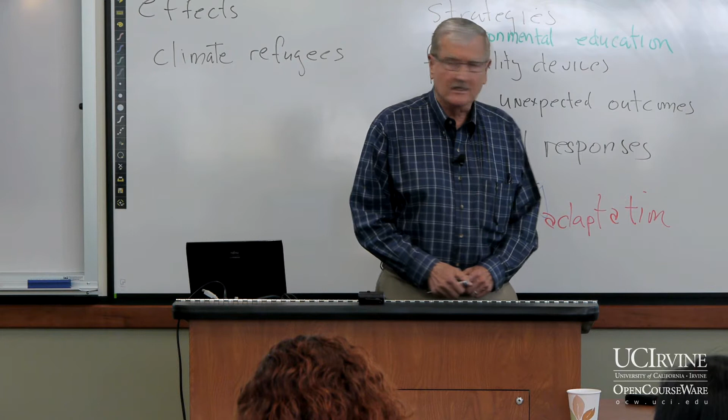Fuel cells will be an integral part of the renewable future, along with solar and wind. Solar and wind are intermittent, but still very valuable resources. We need a stable 24/7 source of electricity to complement solar and wind, and I will present some of those aspects to you. So you should think of this as a lecture on the future for sustainable energy for both transportation and the provision of electricity.

I'm going to start with something you're familiar with, which is the automobile, just to have you understand how it is that you travel from point to point in a vehicle that takes in gasoline and air, and through a process which we call combustion, transforms that energy bound in the fuel to thermal energy. That's something we in engineering can do something with. And with the automobile, we propel the automobile with the provision of useful power for society. Along with that comes another product that we would rather not have delivered, and that's called the exhaust.

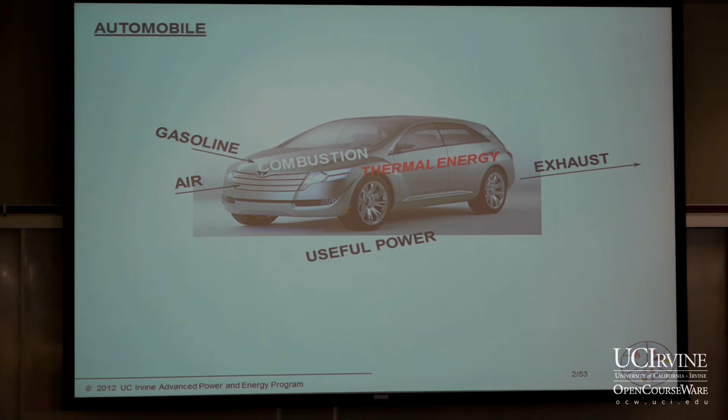With respect to propulsion, many of you came here to Irvine with jet aircraft. Here is a jet aircraft with the presentation of the engine underneath the wing. In this case, we compress the air to a high pressure and high temperature before we add the fuel. We again have combustion, and that provides us with that thermal energy. It's giving up that energy that's bound in the fuel to something we can do something with. And in this case, we provide a propulsion force to push that aircraft ahead. But then that other product, exhaust, comes along for the ride.

Many of us depend upon electricity. I certainly found that I did this morning when I woke up with our grid being down. The alarms did not go off. The lights did not go on. My computer did not go on so I could refine this presentation this morning. In fact, that's the place where that presentation was up until 10:30 when the lights came back on.

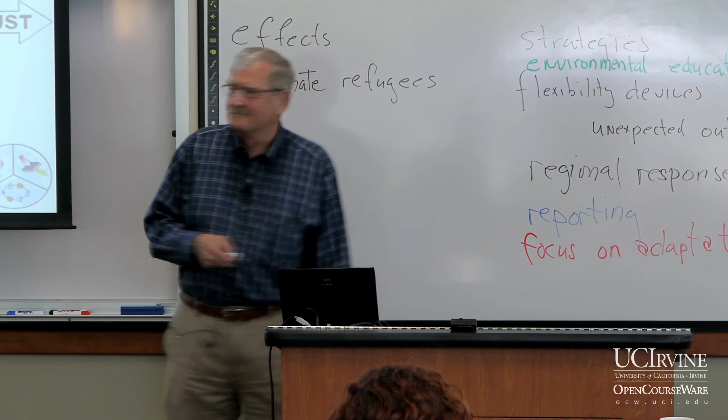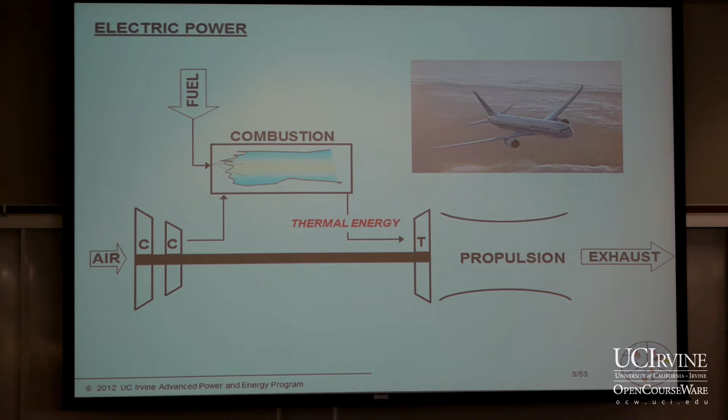In that case, we're after electricity. And this particular engine, called the gas turbine, is something we use to produce much of our electricity today. It's really the go-to technology where we take this off of the wing, place it and bolt it to the ground to provide not jet propulsion, but electric power. In that case, we take away this nozzle and we replace it with another turbine and electric generator to produce the electricity that we all depend upon as we do at this very moment.

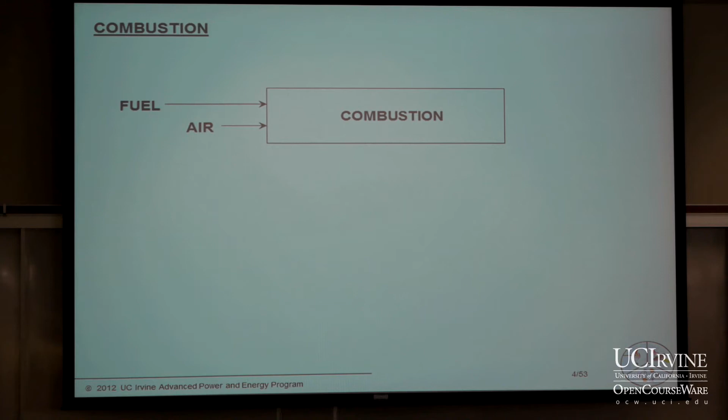That's the useful power. And then along comes with that, what? The exhaust, right? So if we go to a kind of a mechanical engineering description of this process, we have a box that's being fed with fuel and air. We have the combustion that's giving rise to that thermal energy. And then depending on the engine we're using, we produce that useful power. That's what we're really after for all of us to be able to utilize. But there's that other deliverable right here, the exhaust.

So I'm going to take a moment and tell you why I'm focusing on the exhaust. And that is because combustion produces 80% of the world's power today. Think about that, from the aircraft to the automobile to the truck to the ship to the locomotive to the provision of electricity. It served us very well for more than 100 years, but it has this exhaust. And that exhaust is made up of what we call the major products of combustion: CO2, water, and nitrogen. That's almost 100% of the exhaust.

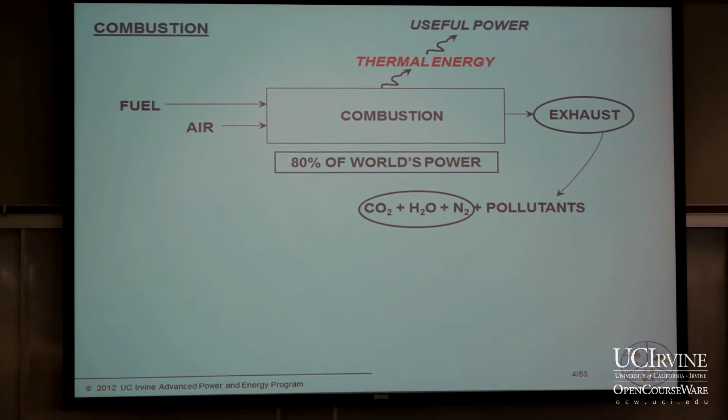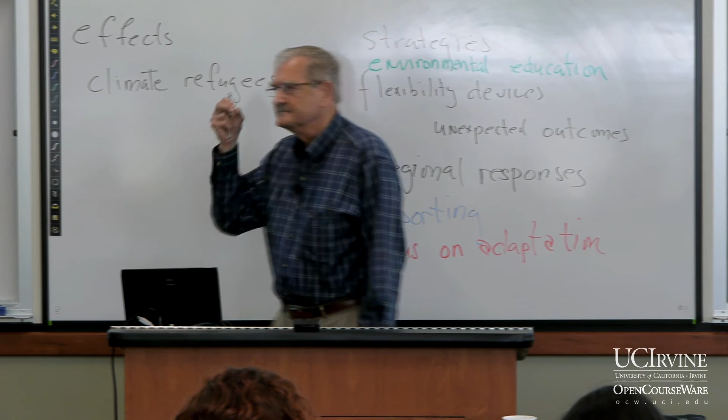And then in very small amounts, we have these other things that come along, and those are called pollutants. We'd like to ignore those. From an energy point of view, we do. They don't really amount to much. But Mother Nature has arranged for those pollutants to do something, to keep us aware that we need to be good stewards in the use of natural resources. One of those things it does is produce photochemical oxidant, which here in the Los Angeles area has been a challenge since the early 1940s. We call that smog. It's not the right term. It's really a photochemical oxidant, but nonetheless, it affects the public health.

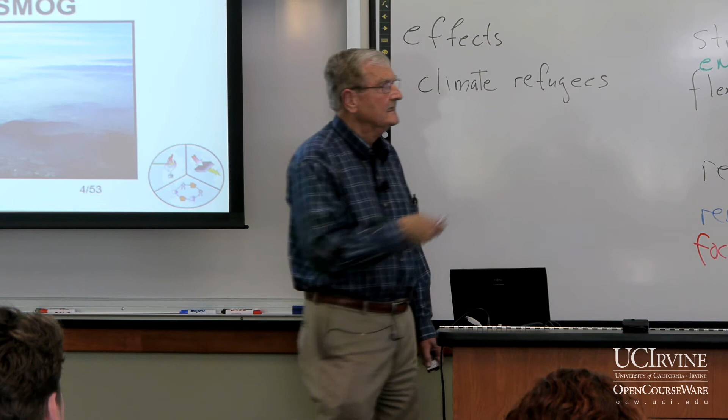We now have another issue, CO2, because it's increasing in the troposphere, and that, of course, is a greenhouse gas giving rise to global climate change. Just to put this into perspective, and this is really the main picture I'd like you to retain as we go through the lecture today, look at this picture of the Earth. It's pretty big, about 8,000 miles in diameter, and you see upon that Earth a small little bubble, sphere, purple, right here. That's all of the air associated with the Earth.

That's the volume of air associated with the volume of the Earth. If we spread that around the Earth, which Mother Nature did, it's a very thin onion skin, only 10 miles deep at most. It's a precious resource that for 100 years we've contaminated with pollutants and carbon dioxide, and we're being told that this is not healthy. We've been working on changes for 50 years, reducing emissions from automobiles and power plants, but it's not enough. Now we have this added issue of global climate change, giving rise to a major shift in the way we're going to have to do business in the next 100 years.

But before I get to that, we're talking here about exhaust contaminating the troposphere. That's pretty serious, right? Something we don't think about is this right here, that air. That air goes into the automobile, for example. Do you think about that? No, you're thinking about that gasoline and the dollars per gallon. But just think about one tank full of gasoline. Today in US dollars, that's about $50 to $60. It's about 20 gallons and it weighs about 180 pounds, about a body weight.

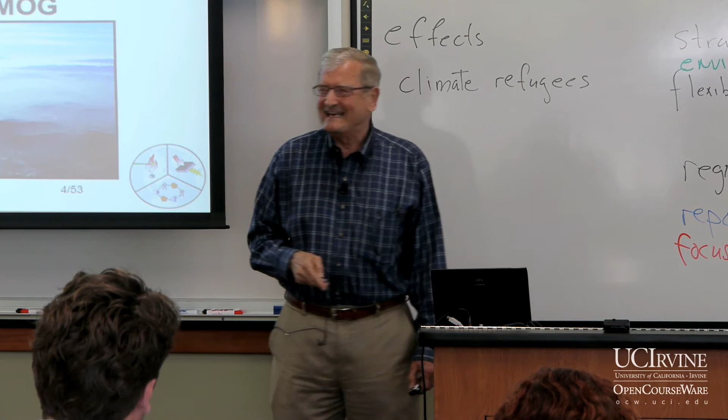So my question to you is, when we consume that tank full of gasoline, about 350 miles, how many pounds of air do you process? How many pounds of air go through your engine? Air is pretty light, gasoline's pretty heavy. A good guess is 10 pounds per 180 pounds of fuel. The actual answer is 2,000 pounds, one ton of air.

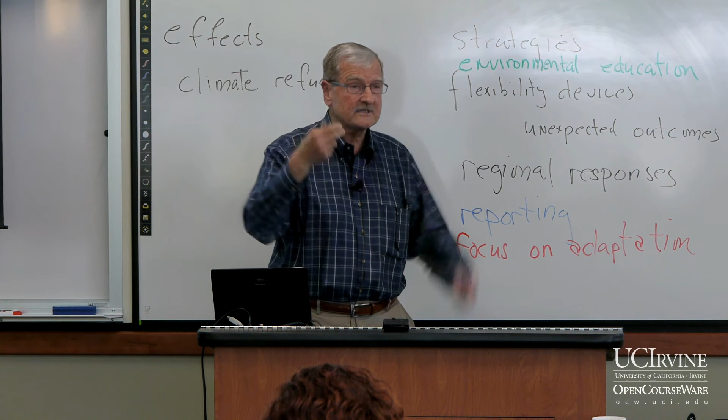Much of that is nitrogen, you know that from your physics. Some of it is oxygen, about 400 pounds. So 400 pounds of oxygen are consumed with every tank full of gasoline. Have we thought about what Mother Nature does with that? How does she replenish that into our atmosphere? How's she doing in that regard? I'll just leave it at that for you to ponder. But it is a resource, an air resource. We depend upon it, our food depends upon it, oxygen. And we're consuming it and expecting something out there to kind of replenish it and bring it back.

So in summary, I have a box here which shows that 80% of the world's power is associated with our use of combustion. Approximately 90% of the world's pollutants come from combustion. 94% of the world's CO2 comes from combustion. And with every tank full of gasoline that we utilize, we are consuming 400 pounds of oxygen.

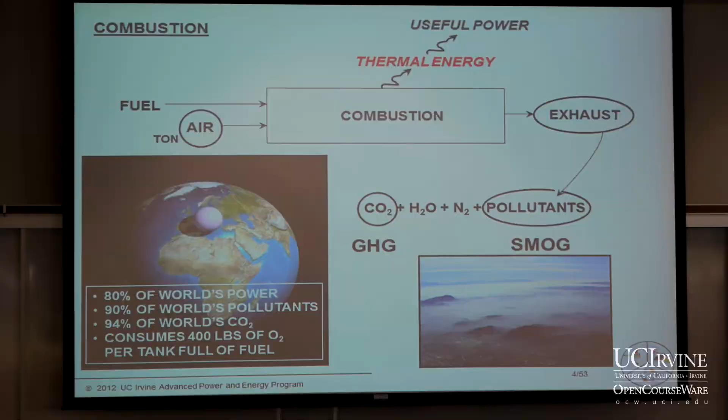Now with that, let's look at what we're up against. These are the forces that are causing change to your future. I would say my future as well, but you have more of a future than I do. I'm probably going to survive fine on gasoline. You're going to find a very different paradigm. So those of us like Professor Wiley and myself, when we were your age, the computer was just being part of the collegiate life, these big mainframes. And of course, now we have them here.

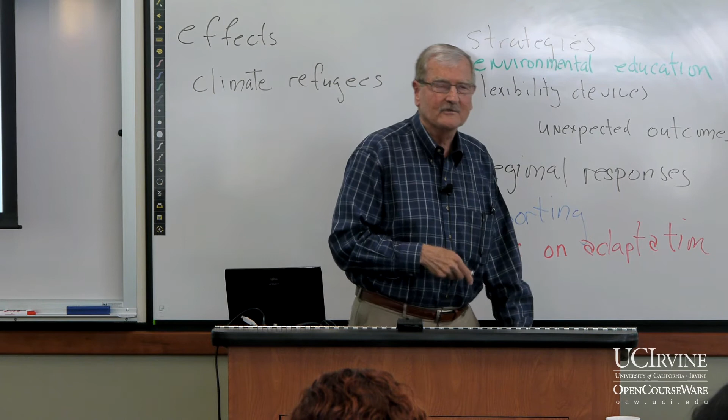You should think of the same as the fuel cell. Many of you are just hearing about it for the first time today. It'll be an integral part of your life in the future. So it's just a chance for you to see why that is. These are the forcing functions. Urban air quality, we aren't doing enough to bring that to the quality that our public deserves. Climate change, we know that we have a major challenge there, and our current way of doing business is not acceptable.

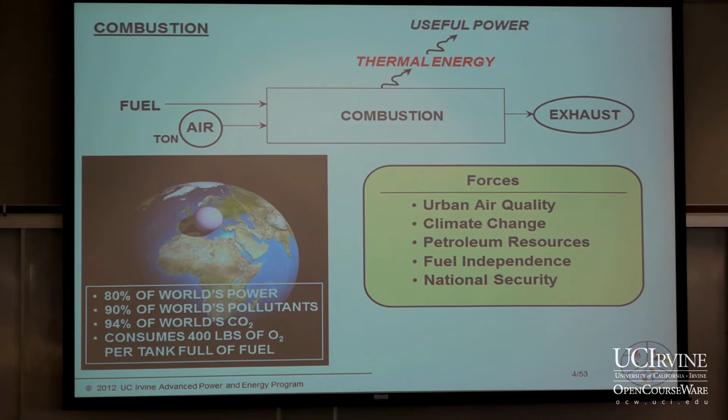We have now the recognition that petroleum is a finite resource. We're probably going to reach what's called the peak of the Hubbert curve in 2016, where we are using more than we're discovering. And since 9/11 in New York, we have fuel independence and national security concerns. Not only in the United States, but every country around the world would like to be in full control of its energy supply. Those are the driving forces.

The paradigm shifts are in transportation, in electric power generation, in building design, in conservation, and in the design of communities of the future. It's an extraordinary, exciting future. Who would have thought we'd be able to re-engineer basically society from transportation to electric power generation? We're able to start with a clean slate. There'll be a transition, there'll be many decades, but that's what we are able to be involved in right now.

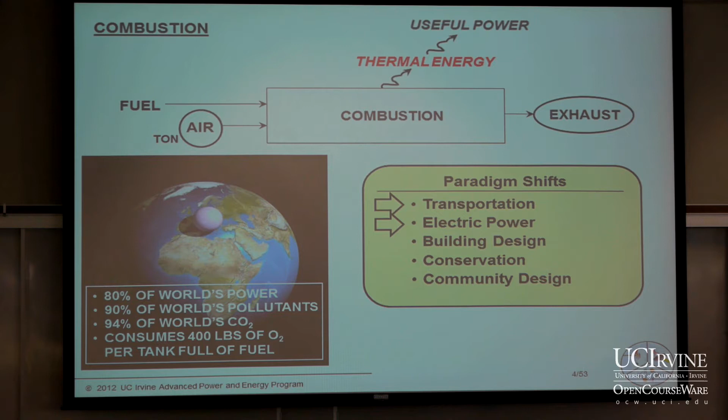How are we going to do it better in the next 100 years than we did in the prior 100 years? I'm going to focus on two of these, transportation and electric power. If you have questions on the others, we can go into those. But transportation and electric power make up about 70% of our energy portfolio, and so they deserve our attention.

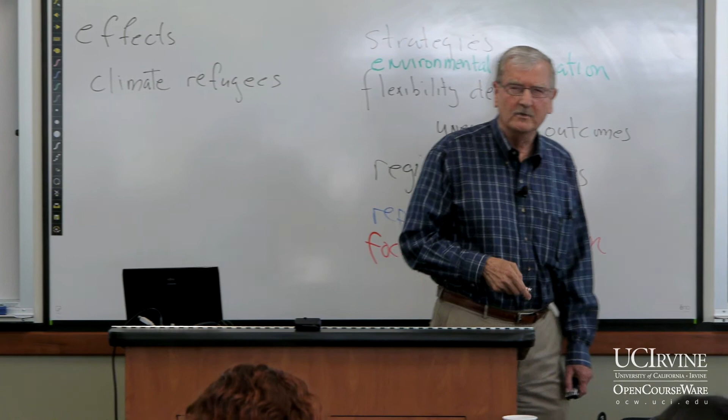Let's see if we can't do something better than that. We're going to focus on carbon dioxide because it's an indicator not only of the emissions of greenhouse gas from the automobile, but also it's an indicator of the efficiency. The lower the CO2 per mile traveled, the higher the efficiency of the vehicle. And I want to use this chart to provide us some guidance in that regard.

It's a chart that shows the emission of carbon dioxide, the greenhouse gas, from 0 to 1. So it's normalized to what's called the gasoline vehicle, where the normal vehicle is going to be 1. And you see right here something very interesting, which is the amount of CO2 that comes from the vehicle, shown here in orange, versus the amount of CO2 that comes from the generation, transport, and refining of the fuel to your pump. Only about 12% of the energy that goes into the automobile comes from getting that fuel to the automobile. It's very impressive, actually. I would have thought it would be more than that.

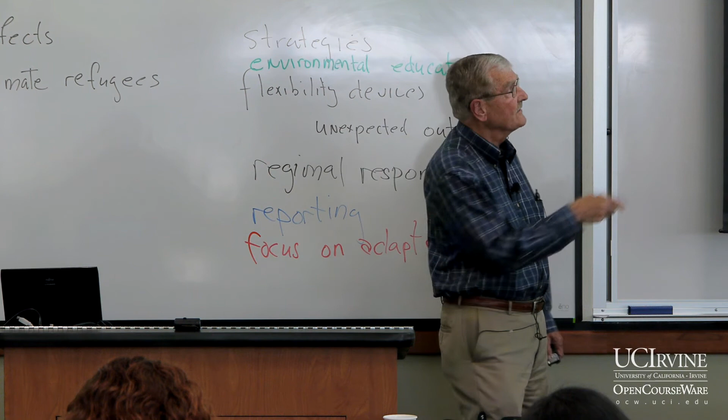So are we okay at that point? That's going to be our normalization. And our goal is to take this number from 1 down to 0. Because what we're after is an automobile that produces 0 CO2, completely eliminating the emission of carbon from the automobile.

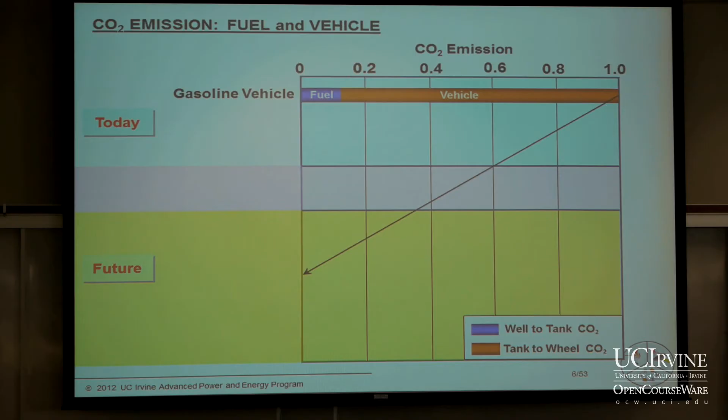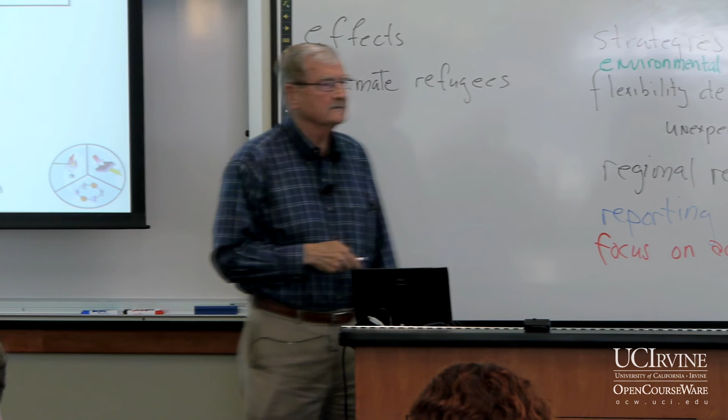And what it does, of course, it reduces the CO2, the water, the nitrogen, and the pollutants as well, correspondingly to that improved efficiency. That's a step in the right direction, and we already see that shift being deployed around the world. What if we take that vehicle and place it on this plot and see how it looks? It does what you expect. It reduces the emission of CO2 by about a factor of 2, corresponding to the increase in efficiency by a factor of 2.

Something else that we can do is go to a zero carbon fuel. For example, hydrogen. It's one of the attractive features of hydrogen, no carbon. What that does is not change much here, but it takes out of the exhaust any carbon-containing species: CO2, CO, and hydrocarbons. How does it look on our plot? It looks really good.

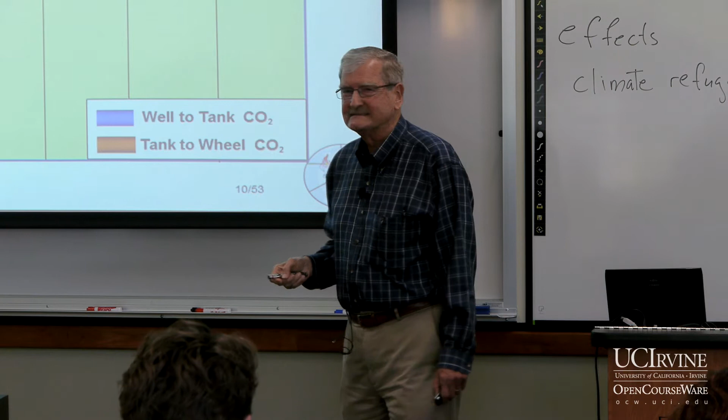It's actually not this good. That's what it looks like. Son of a gun, kicked ourselves in the shins.

It takes a lot of energy in the absence of advanced technologies to generate that hydrogen. But note there's no CO2 emission associated with the vehicle. This is all from the fuel production.

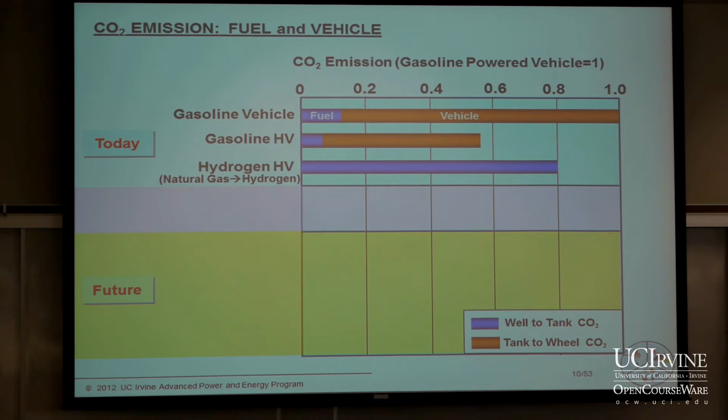Well, what can we do about that? We can introduce what we'll call the hybrid fuel cell vehicle. This would be your first glance at the role of the fuel cell in your future. Right here is the reciprocating combustion engine, and right here is the fuel cell replacing it. That's all it takes. Putting a fuel cell under the hood changes this up quite a bit.

That's one of the remarkable features and attributes of fuel cells: their very high fuel to electrical conversion efficiency.

What does it do here? Right here it reduces the amount of air we're processing to 500 pounds, and the amount of oxygen we're taking out of the atmosphere to 100 pounds per tank full of hydrogen. Over here we still have water, we still have nitrogen, but virtually no pollutant.

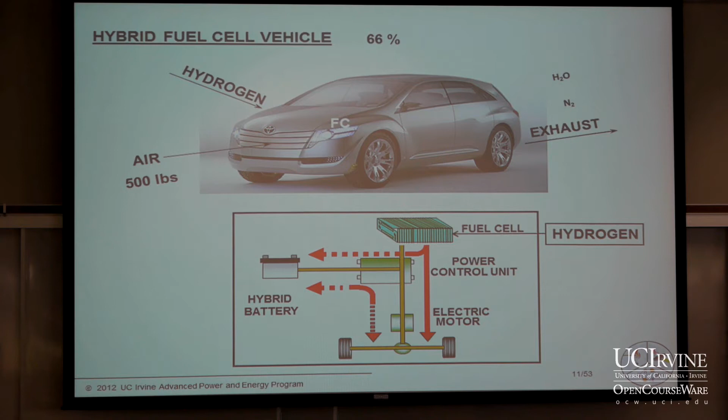What that does on this chart is give us this signature, and that's correct, going the right direction again. It's better than the gasoline hybrid, but not quite as much as you would expect. Still, it's going the right direction, and that's why, among other reasons, a fuel cell is so seriously considered for the future automobile. Let's take a moment and look at the fuel cell.

For us in engineering, that's fortuitous, because we would like to use electrons to drive a motor, to drive a load, to light a light bulb.

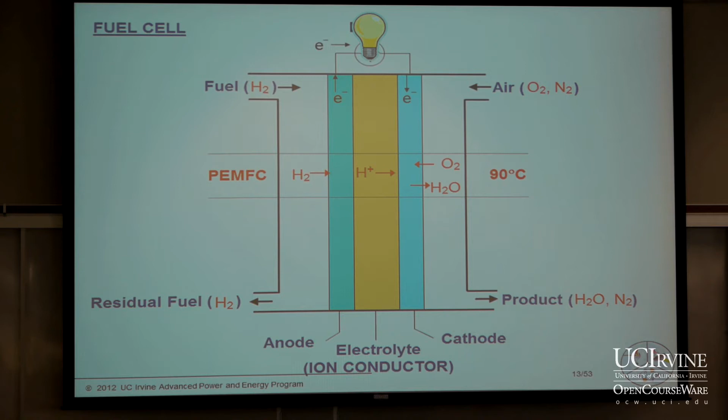This particular kind of fuel cell you can turn on and off like you do with your automobile today. So it has the right features for the automobile, and as a result it's selected as the fuel cell for your future.

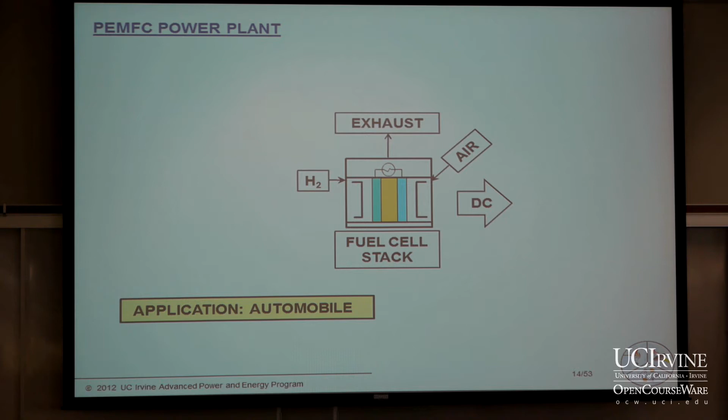If you look at the way the fuel cell would look underneath your hood, it would be a stack. It would have hydrogen coming to it, it would have air coming to it, and it would give out direct current to drive that motor of your fuel cell vehicle. And it would have the exhaust, which you now know is made up of water and nitrogen.

There are other types of vehicles already deployed in testing. There's the fuel cell bus in both Europe and some in the United States, quite a few in Japan. And a commercial vehicle is the forklift.

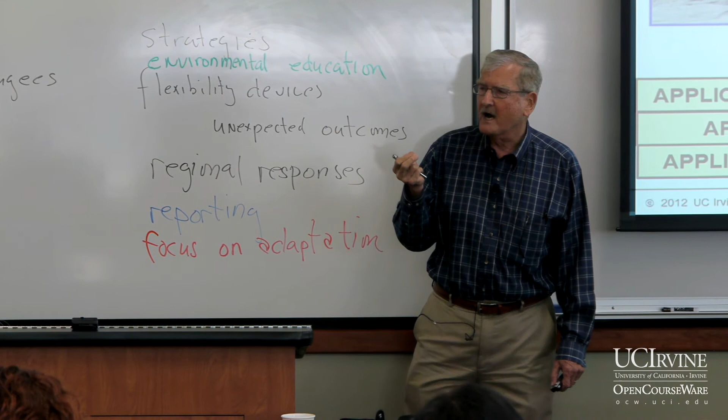Batteries take 4 to 8 hours to recharge. A fuel cell takes 4 minutes to recharge, and when charged, will run for many, many hours. A battery will not. So this is an extraordinarily popular early market for fuel cells today, in these specialty vehicles, these forklifts.

For these vehicles, the projection is 2015 for commercialization. Some companies are saying 2014. So we are preparing right now, because that's not too many years away, 2 to 3 years, for this vehicle to be available to those in certain areas of the world initially, primarily Japan, Europe, and the United States, in that time frame, 2014, 2015.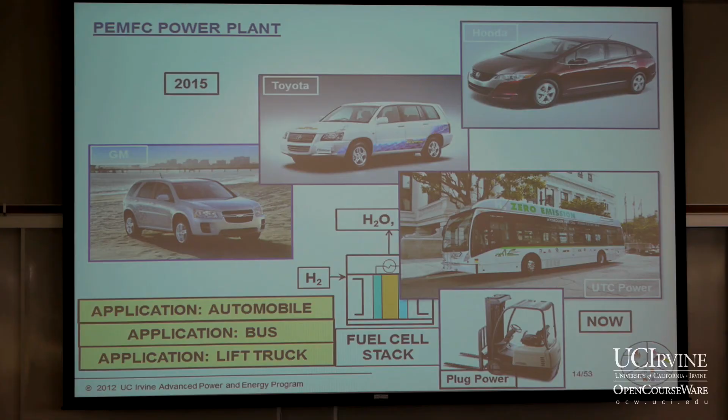The automobile companies have been committed to this since the late 1980s. They've invested billions of dollars to ride this technology. It's an extraordinary vehicle. You go bonkers to drive it. It's quiet, it's responsive, great acceleration, and just a real kick to have under your foot.

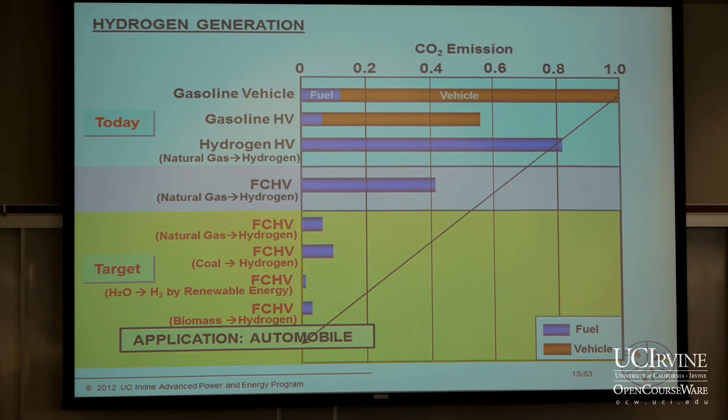I want to take a transition here from transportation we've been talking about to electric power. Before I do that, are there questions you have about the automobile?

Yes? Could you talk a little bit about the downside? It seems so perfect, but are there unintended consequences of transitioning to a hydrogen fuel cell, and what are some of those? So the question is, what is the downside? It seems almost too perfect. And the downside is that it is too perfect, because it's difficult for anybody to accept something that is that good. But time is showing that more and more there's an appreciation for it.

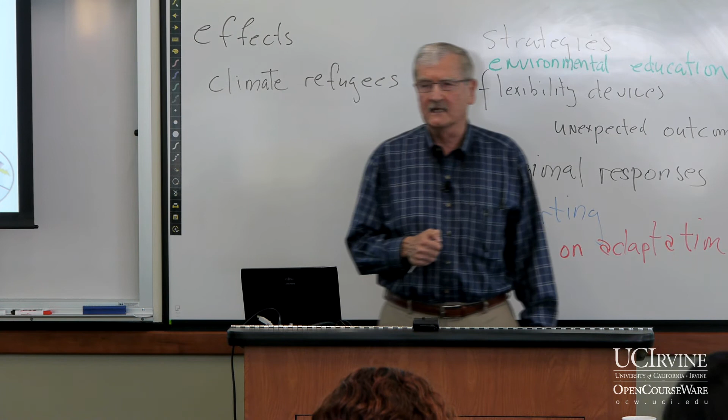There are three areas of concern that I identify. It would not be a downside right now, but a concern. One would be to assure that we continue on this path of generating hydrogen with a low carbon imprint. We really have to force that, come up with technologies that are economically viable to do that. The second is the hydrogen infrastructure for refueling. We're actually in a panic right now because we do not have that effectively deployed to where a market can be created. We must do that in the next 2 years, and that's a separate story, but that's a downside of recreating a new infrastructure for fueling.

Fortunately, it's only going to be about 15% of the gasoline stations we have today that have to be retrofitted with hydrogen to serve the entire public. So that's good news. And then the third concern would be safety. Like natural gas and like gasoline, hydrogen is flammable. It has a few characteristics that need to be addressed from a safety point of view.

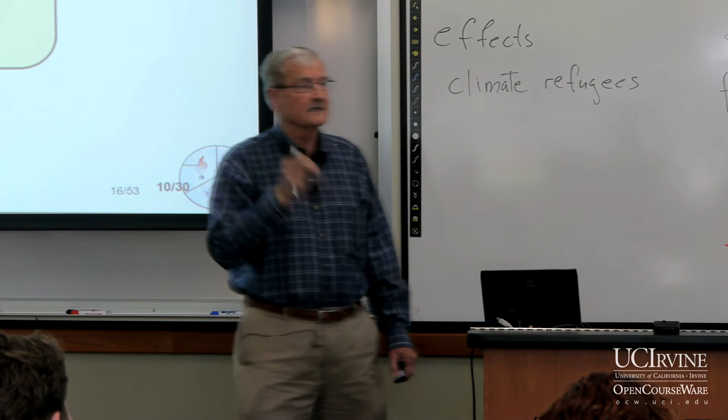I'll just mention two. One is an odorant, like you have with natural gas, so if there's a leak, you can smell it. And secondly, if it is ignited, it doesn't give off a highly visible flame. In fact, it's almost transparent. So an additive would not only provide the odorant, but also a bit of color, so if it does ignite, you would be able to see it and then just stay away from it, like in an automobile crash. Another question?

Yes. In the process of using electrolysis of water to extract the hydrogen, it has a very small carbon footprint. So where does that carbon footprint exactly come from? Is that calculated in the production of the equipment, or using chemicals, or where does that carbon footprint come from? So the question is, on this plot where we showed renewable electrolysis still had a carbon footprint, it comes from the transport of the renewable hydrogen to the point of use.

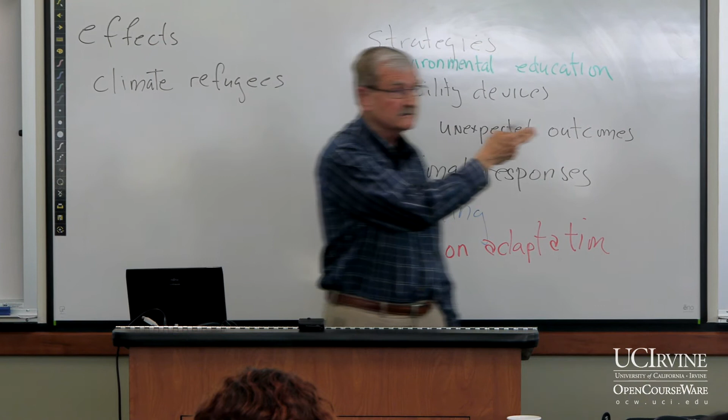We're expecting most of the hydrogen to be produced in large wind farms, which in the Los Angeles area are about 40 to 50 miles away—Beaumont being one, Tehachapi another. So the transport of it here by truck would have a carbon emission. We expect, though, not to be transporting it by truck, but by pipeline. The pipeline would almost bring that to zero because the electricity we'd use for the pipeline would use renewable electricity. So that little bit of the signature is based upon the assumption of truck transport.

Let's transition—we'll take one more question, thank you.

In the research that I've been around at the University of Florida, we talk a lot about fuel cells, and most particularly the catalyst that's used to split the hydrogen and oxygen. Are you using platinum as your catalyst for that in the cars? And if so, how do you see that demand for platinum in building fuel cells affecting the countries where platinum is most prevalent for extraction?

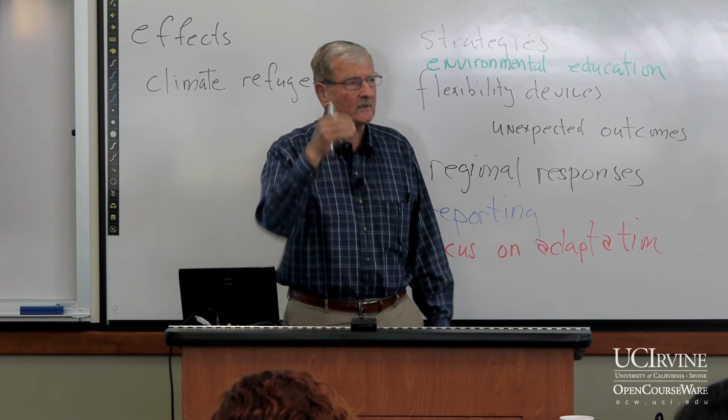The question has to do with the need of a noble metal in these fuel cells. In the proton exchange membrane fuel cell that we've just described for the automobile, it does require platinum on the anode to catalyze the reaction of the hydrogen. The automobile companies and other researchers in the last 8 years have dramatically reduced that loading to where it's less than the loading you already have in the catalytic muffler. So it is going to increase the demand for platinum, but with the process and progress being made in reducing that, and in alternatives, it's expected to not be nearly the issue that you are anticipating from your research. Still, it's to be proven, so we have to keep that high on the list of areas to watch. On the next fuel cells I'm going to introduce you to, no catalyst is required because they operate already at a higher temperature.

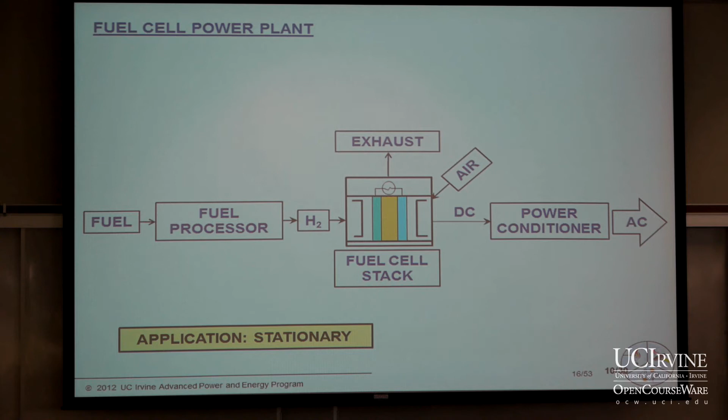Let's move to that. I want to go to fuel cells that produce electric power. We bolt those to the ground, so we call them a stationary application. To operate the fuel cell, we have to derive the hydrogen from a source. That source is typically natural gas, and we take that through a reformer in order to create that hydrogen. Direct current is something we don't normally use in an application like this room—we use alternating current. So over here we have an inverter, or power conditioner, to derive that AC. But otherwise, you see the basic principles of a stationary fuel cell system.

If I really look out into the future, what you might think about for a home or dormitory, some sort of housing unit somewhere in the world, would be a unit where there's sun available for photovoltaic on the roof—renewable—and then a fuel cell in the garage or to the side of the house. During the day, the photovoltaic provides electricity to the home, as you'd expect, but we can also provide electricity to the fuel cell. Usually many of us are not at home during the day and there's excess electricity, and the fuel cell can be run in reverse. It can take the water produced the night before and electrolyze it back to hydrogen and oxygen during the day.

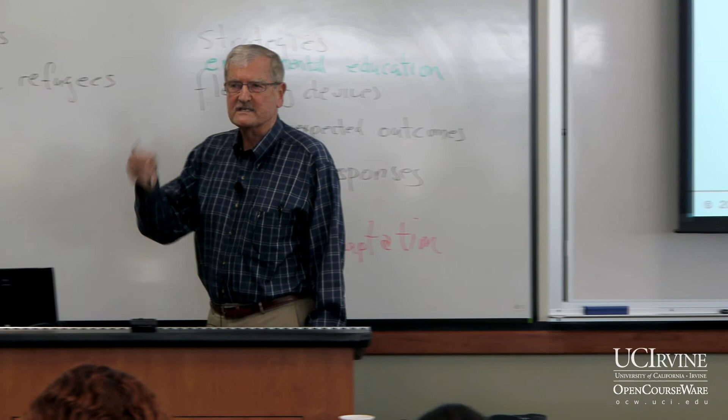So that when night comes, we can go to the fuel cell and ask it to operate in the forward direction and provide electricity to the house. In addition, you should also think about the likelihood of being able to provide hydrogen to your hydrogen fuel cell vehicle as well. Now, this has no connection to the grid, no connection to natural gas pipelines or a propane tank. It's renewable, regenerative, and non-fossil fuel, producing electricity 24/7, and with some water going into the system, hydrogen for the vehicle as well.

It's just a concept, but I want you to think about the epitome of a renewable operation of a home by integrating a photovoltaic panel with a fuel cell. I moved that up so I could introduce you to a larger fuel cell called a phosphoric acid fuel cell.

It operates at 200 degrees centigrade with virtually the same chemistry as the PEM. This is the longest running commercial fuel cell in the world, about 20 years.

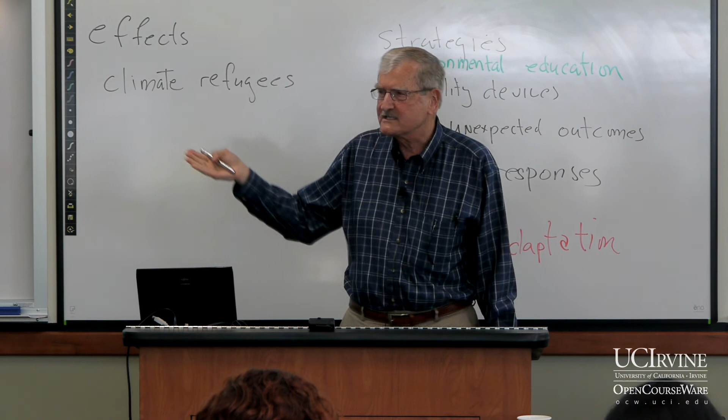Why haven't we heard about it? Because it's too perfect. It's hard to market something that's so good, doesn't make any noise, and doesn't turn anything at all. It just sits there and hums like a transformer. How excited have you been to see a transformer around campus? Those little green boxes—stop next time and just listen to it. It's a little bit like that; that's what a fuel cell sounds like.

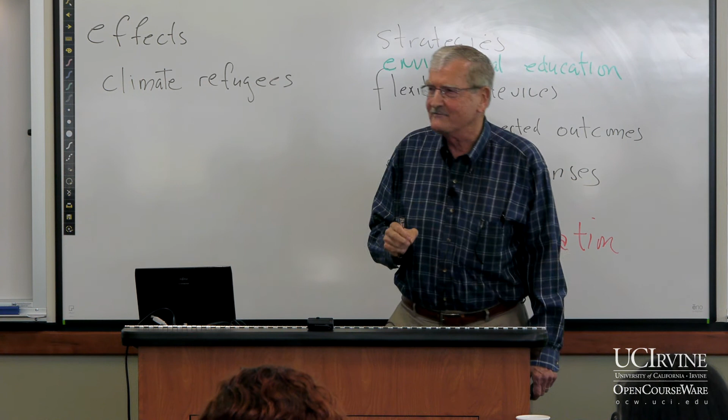Totally a disaster to market, but commercial for 20 years, in California—that's the state of California.

This turns out to be essential for marketing, because you've got to develop the confidence of the market that these things really work. It takes quite a time to get a variety of applications up and operating to where a new customer can say, where have you done it before? You can say, well, over there, let's go visit it.

That's now evolving in California to where we're about at what we call the tipping point, where this market will start to take off. Examples include, for this phosphoric acid fuel cell, a hospital in St. Helena—that's a 400 kilowatt fuel cell—and also a grocery store in San Diego, in Albertsons.

This fuel cell produces electricity at 40%, 42% fuel-to-electrical conversion efficiency. But remember, it runs hot, so the heat goes out of the exhaust and goes into a box at this Albertsons, and that box provides cold water that displaces a lot of the energy that goes into the refrigeration systems in grocery stores.

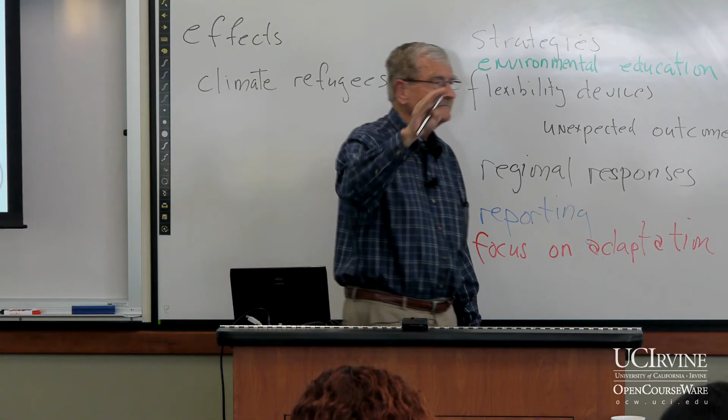Think about walking through a grocery store—you've got all those open refrigeration units, right? Takes a lot of energy. In this application, the heat coming out of the exhaust, that would otherwise go to the atmosphere, is being captured. It's called cogeneration: turned into cold water and displacing electricity that would otherwise be used for that refrigeration.

The heat coming out of that absorption chiller is even lower temperature. Rather than throwing it away, it goes through a desiccant. What's a desiccant? It's a material that is absorbing moisture from the market. When you're in the grocery store, there's actually a lot of moisture, and they have to dehumidify that. Often they take the air out of the building, put it through a desiccant that absorbs the water, and then bring back in the dry air.

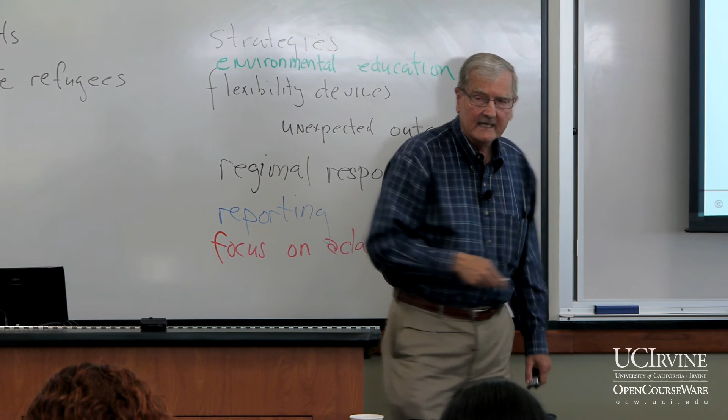You need to regenerate that wet desiccant. So by taking the low quality heat out of this unit, you can regenerate that desiccant. The overall efficiency jumps up to 80%. That's a whole new paradigm called cogeneration—just keep that in mind: combined heat and power, combined cooling, heat and power.

It gets into building efficiency, but I just want you to be aware of the utility of using power generators at the site of their application.

The world's record right now for energy efficiency is 92%. It's a casino in New Jersey that has exactly this system, and in the winter it takes the low temperature heat out of the desiccant—which is basically a throwaway, maybe 125 degrees Fahrenheit—and puts it through the sidewalks to keep them from icing, for safety of the customers coming into the casino. Overall efficiency of 92%. It's really, really a nice feel of the future.

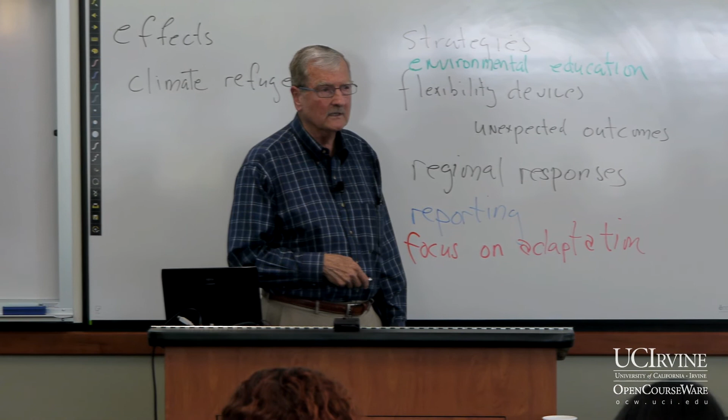This unit produces no pollutants. Remember, virtually no pollutants.

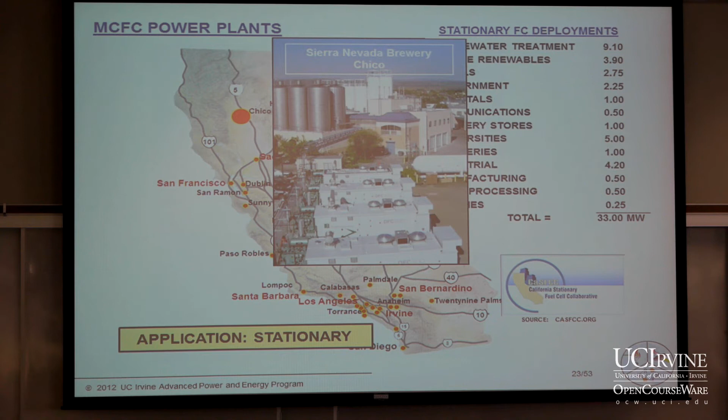That's molten carbonate. Another application you'll be much more aligned with is the Sierra Nevada Brewery in Chico, California. If you ever have Sierra Nevada beer, know that it's being produced by a fuel cell. The fuel cell is driven not by natural gas, but by a digester that's processing the beer waste and producing digester gas. Here you see 1 megawatt of power, and the heat goes back into the digester to support it, again with an overall efficiency of 80%.

It says 9 there, but in the last 4 weeks, 3 megawatts have been added out in Chino, California. And a hotel, 1.5 megawatts at a Sheraton.

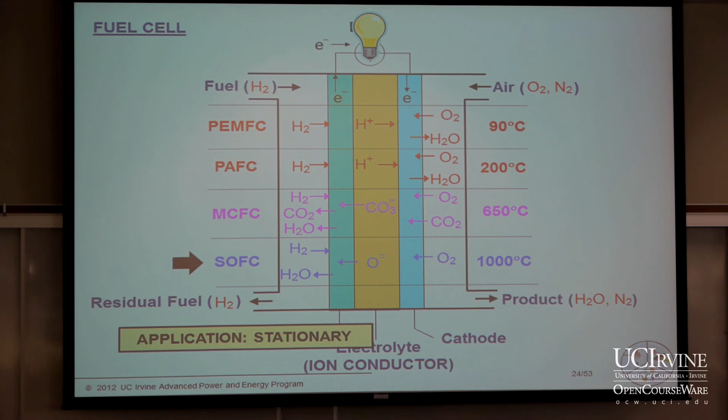The holy grail of fuel cell technology is called solid oxide fuel cell technology. You can see that it operates at an even higher temperature. It became commercial really about a year ago, in January, by a California company called Bloom Energy. They make the units in 100 kilowatt modules.

This is at eBay in Silicon Valley, so that's 500 kilowatts. This is at Google, 400 kilowatts. This is at Caltech, 2 megawatts, a very large installation there, again a university, and then a Walmart facility in Hemet of about 600 kilowatts. So that kind of gives you a feel of the early market, what they look like, how they perform, and why they are going to be so very popular.

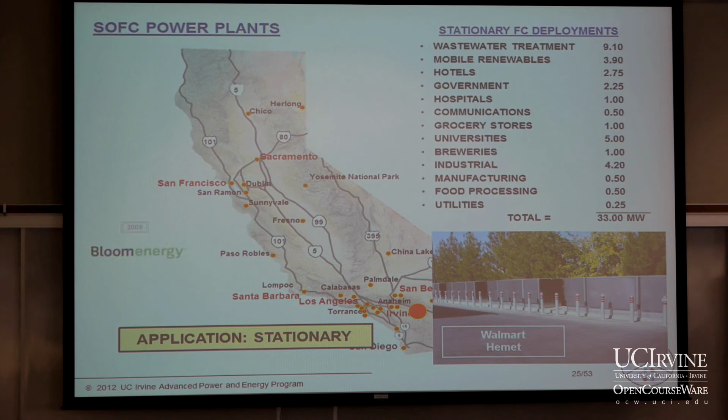From a political and business point of view, I wanted to share an experiment by the University of California, which was to establish a collaborative in 2001 that has as its board of directors a unique group. They're called government agencies, involving California agencies somehow involved in fuel cell technology. It might be in technology development, such as the California Energy Commission, in regulation, such as the California Air Resources Board or the California Public Utilities Commission, or in the actual acquisition of fuel cells for buildings in California, such as the California Department of General Services.

We added to that the federal agencies—Energy, Defense, GSA, and EPA—and then regional agencies. This group meets twice a year in Sacramento to talk about how the agencies can collaborate, cooperate, and share resources, and what kind of policies are needed and need to be advocated for. It's been an extremely powerful and successful activity in spawning the market of 33 megawatts that you see here.

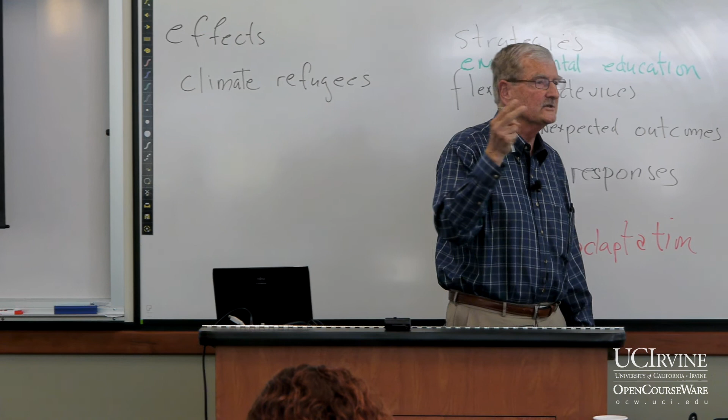What's the difference? It's policy. It's called a feed-in tariff, just now being introduced in California. When you think of markets, you have to think about policy, particularly markets so different from what we're used to. The companies driving the Korean market are U.S. companies—UTC Power with phosphoric acid, and Fuel Cell Energy with molten carbonate. So ironically, today the United States has leadership in fuel cell technology, but we're exporting almost 5 times more than we're deploying domestically. Policy.

To address policy, there's an industry advisory panel headed by one of the members, and here's the makeup of the industry advisory panel, which meets the day before to identify the kind of market constraints being faced and to convey that to the board of directors to consider the following day.

So a bit in summary, this is where fuel cells are being deployed today in major markets: industrial applications, hospitals, office buildings, hotels, and wastewater treatment plants for that renewable 24/7 application. I also indicated that ClearEdge is beginning to deploy fuel cells in residential applications. We see in the future, maybe not too distant, utilities acquiring fuel cells to support the grid at pinch points. We call these Tiger stations, or Transmission Integrated Grid Energy Resource.

With respect to central power plants, you can see the manner by which countries typically produce central power, combustion providing most of it. But the type of technology that's evolving for central power plants is an integration of fuel cells with gas turbines, called hybrid systems. We don't expect those to be deployed for another 15 years, but the design is well underway. For power plants, it would have 75% efficiency on natural gas, zero emission of criteria pollutants, and sequestration-ready CO2 effluent.

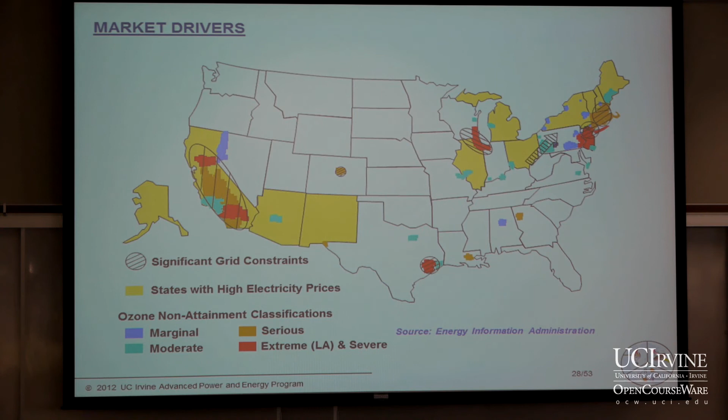Attributes of stationary fuel cells: high fuel-to-electricity efficiency, high quality heat, acoustically benign, virtually zero emission of criteria pollutants, and a fortuitous fit for distributed generation where you apply it at the point of use because it doesn't make any sound, it doesn't emit any pollution. You have people around like you do in this building, and that's why fuel cells are working so well.

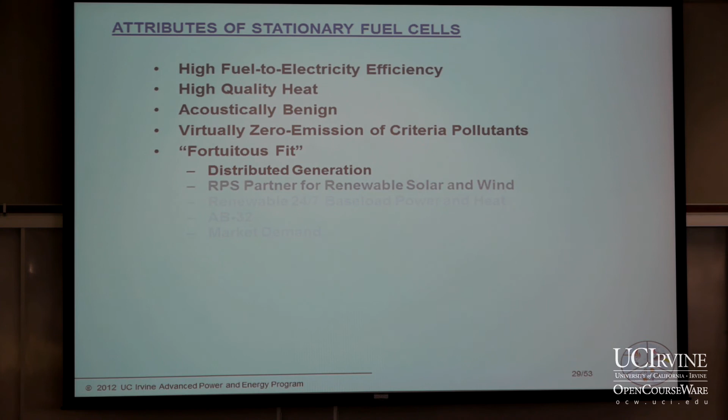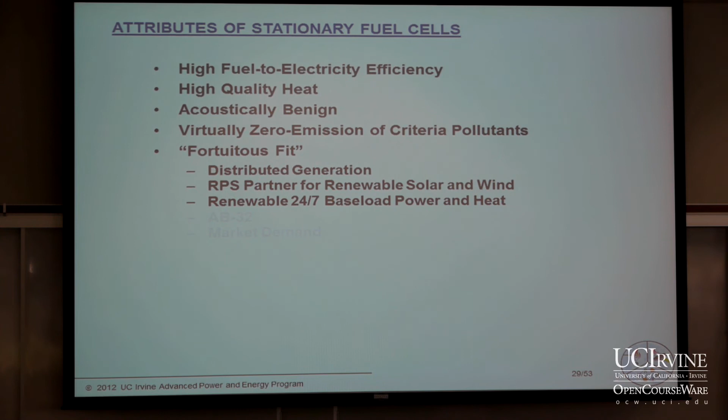A partner—I think I just want to share with you the other attributes of distributed generation. I'll just move on. It's a partner for renewable solar and wind that I alluded to right at the beginning. It also provides 24/7 baseload power and heat. It's very effective in meeting AB 32.

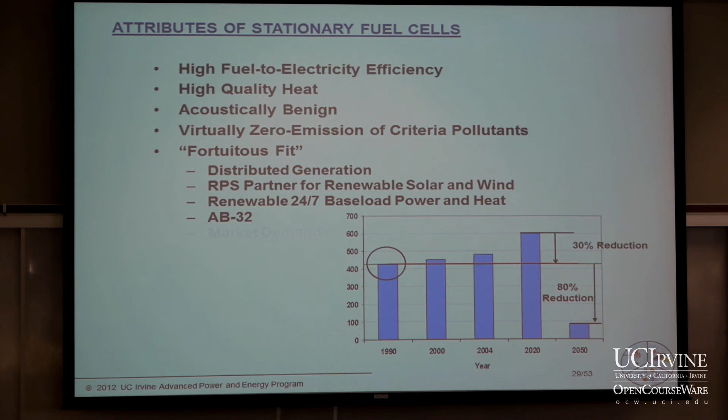That's a 30% reduction. And not quite by law yet, but by governor's directive, we must reduce this by another 80% by 2050. That's really the Kyoto Accords, in California, because the U.S. hasn't adopted them, has gone ahead to adopt them. So we are on a very major track to reaching this goal, and all these attributes give rise to a very major resource of fuel cells to achieving that, and now we're starting to see market demand.

Questions that are regularly asked about stationary fuel cells are: is it a proven technology? So I mentioned the 20 years already of commercialization, a wide portfolio of applications, a burgeoning track record of deployment, and a critical role of the DOE investment in early years, 1970s in particular.

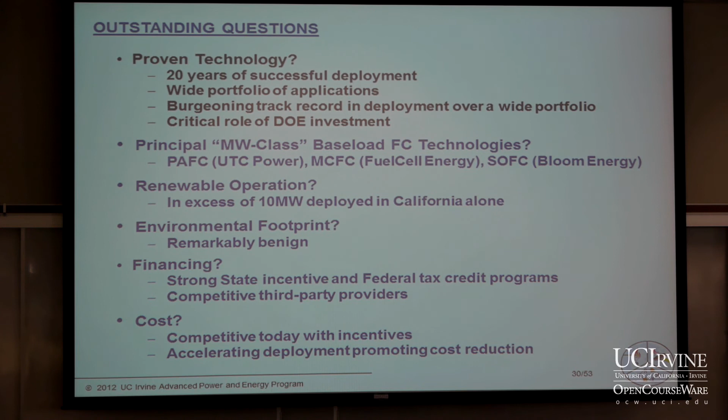Are there megawatt class technologies? The answer is yes. We just had announced last week a 60 megawatt deployment to Korea, so we're in tens of megawatts now. Renewable operation, over 10 megawatts deployed in California alone. Environmental footprint, remarkably benign. Financing—there's strong incentives to buy down the high cost of fuel cells today. And I say here, the cost is competitive today, but we're on a path of acceleration to reducing that cost.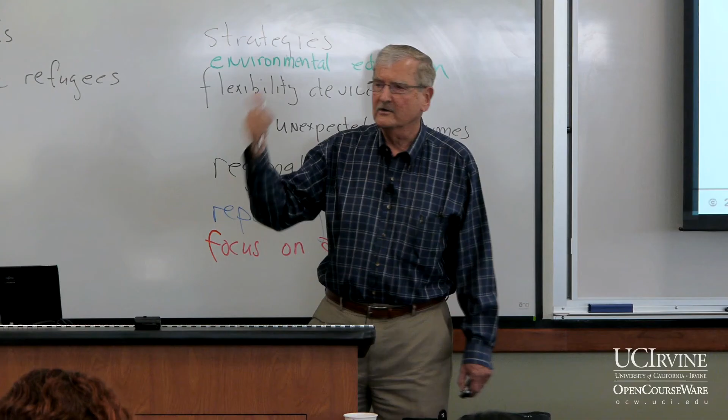It's located here at UC Irvine, and the reason it's so popular is that all the automobile companies in the world have been using this area for testing these vehicles for the last 10 years. This has been the station supporting Toyota, Nissan, Honda, Hyundai, Mercedes, General Motors. All the vehicles are operating here out of the station.

The station is supplied with liquid hydrogen from a processing plant in California that produces it from natural gas. But what if, instead, we brought in a stationary fuel cell operating on natural gas, provided electricity over here to a customer, these condominiums, provided heat and cooling to those condominiums, and then on demand provided hydrogen to support the station.

It seems like a simple concept. What I want you to understand is that today that's the most energy efficient and environmentally responsible way of producing hydrogen 24/7. We call that an energy station.

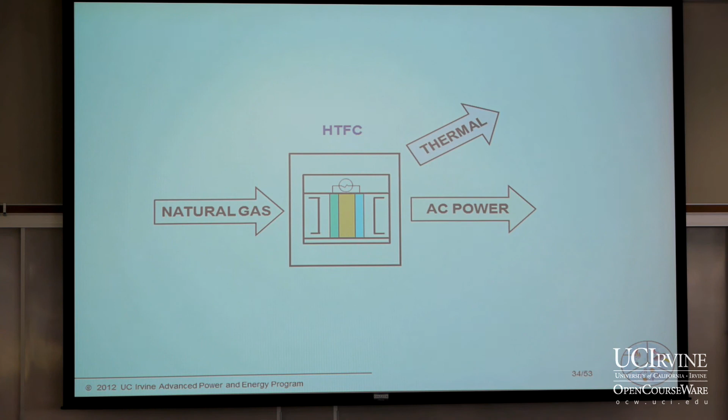Now, if instead we use natural gas here, here it is in a cartoon version of how it would work. Let me just show you why it's so successful. There's a synergism, and this is the first example I want to share with you.

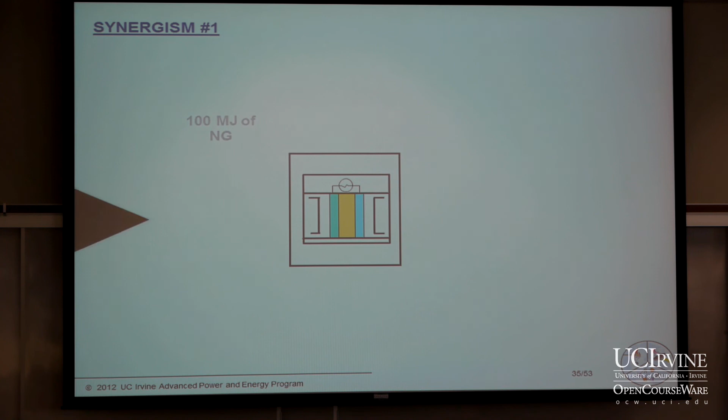Let's put into this fuel cell some natural gas, 100 megajoules of natural gas, and out of it we'll get 47 megajoules of electricity and about 53 megajoules of high-quality heat. That's the way the fuel cell, at least molten carbonate, operates.

If instead we change to a tri-generation mode, where instead of just electricity and heat, we add the generation of hydrogen, we can do that by increasing the input of natural gas by 43%, putting in 143 megajoules of natural gas. We still get 47 megajoules of electricity and 53 megajoules of high-quality heat, but now we also get 43 megajoules of hydrogen.

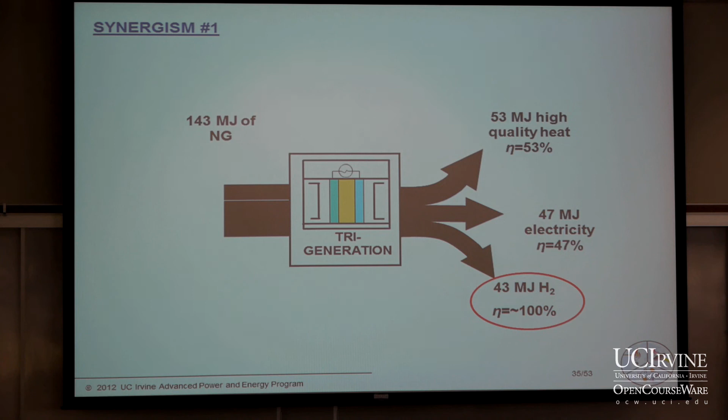The reason the efficiency is just about 100% is due to the synergism. The higher the hydrogen in the anode, the higher the efficiency of the fuel cell. Most of you who have had chemistry know that when you increase the concentration of reactants, the reaction goes faster. Same principle here. Typically we don't do that because we don't have a use for the hydrogen. But now we've come up with the use of the hydrogen, and that is to support a hydrogen fueling station.

Now what if instead of natural gas we bring in another supply of fuel, a renewable fuel? This ties in to Professor Whiteley's renewable energy concept. I told you I'd bring in little snippets of it. What we get out of this now would be a renewable energy station with the electricity, the thermal product, and the hydrogen all coming from a renewable resource.

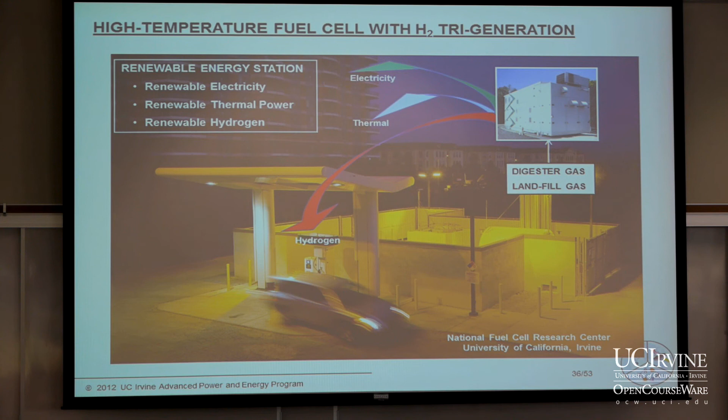Pie in the sky? Possibly. It does reach this goal of zero carbon because we're using human waste to produce the fuel.

And it produces now the hot water, but it also at the same time produces another product, electricity. In this example it could be hundreds of kilowatts or megawatts. This is what's deployed around 10 megawatts in California. That's why it's so successful.

This new technology, where we bore into the fuel cell and extract out hydrogen on demand, is the unique feature of this biohydrogen. And this picture is really the epitome of sustainability. It's using human waste to produce electricity, which we need, heat or cooling, which we need, and then the transportation fuel, which we desire, all from human waste.

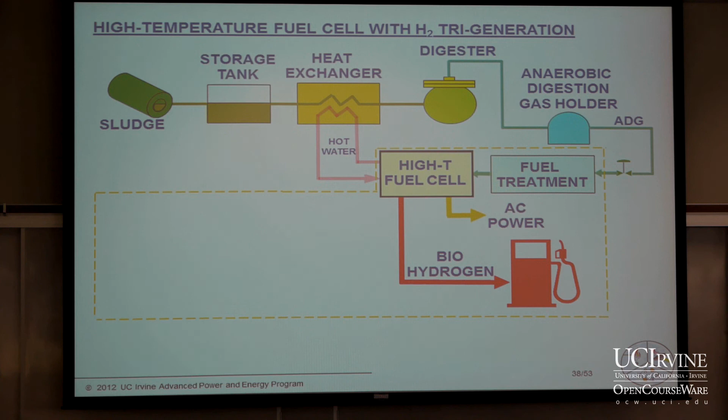This is actually in operation today, about 10 miles from here, north, at a facility called the Orange County Sanitation District. It was commissioned about a year ago, and today you can actually go and obtain hydrogen from the human waste at that particular station. This was a strategic alliance of these companies. You'll find this technology probably being deployed in many different areas as time goes on to produce hydrogen from various domestic sources around the country.

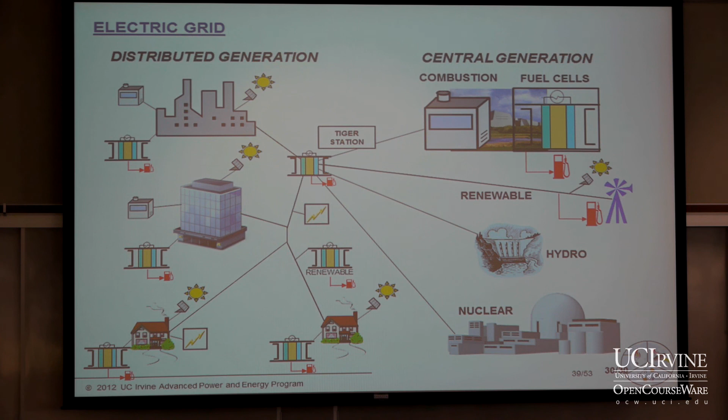Synergism 2, and we're getting close to closure, is coming back to our gas turbine that's generating electricity. If we take the combustion away and replace it with a fuel cell, it turns out that the fuel cell operates much better. It likes a pressurized environment, something we didn't know 15 years ago. And it gives rise to the oxidation of fuel and air to drive the turbines, but at the same time producing electricity that the combustion alone did not do.

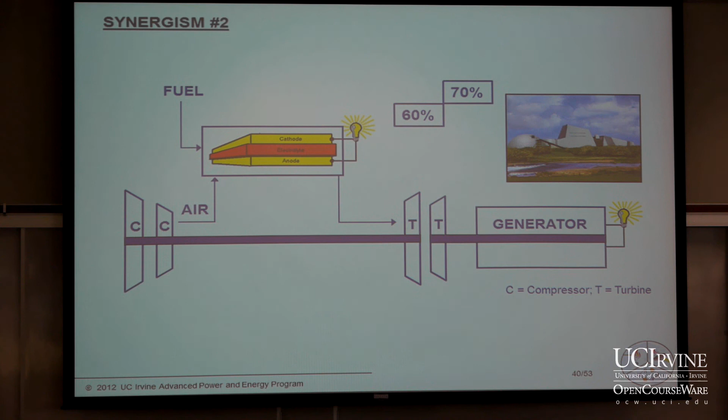Notice, no electricity here, producing pollutants. Here, electricity, higher conversion of fuel to electricity and no pollutants. So we're projecting fuel-electrical conversion efficiencies of 60%, 70%, and even above 70% in the future. This is called a hybrid fuel cell gas turbine.

And where is it going to be deployed? Well, let's look first at how it looks on this map. This is a plot of efficiency of the power generator as a function of its size. So 1 kilowatt is like a home, 1 megawatt is a hotel, 10 megawatts would be a university. Here at UCI, our peak load is around 28 megawatts. And then central power is 1,000 megawatts.

We populate this space with gas turbines today, and you can see we're getting up to higher and higher efficiencies. To do that, we have to go to larger units. And there's a thermodynamic boundary based upon the Carnot efficiency of about 65%. We're getting pretty close to that with current systems today, very impressive with high distributed generation applications or central power. Kawasaki particularly is deploying one of those HAT, humid air turbine, cycles today.

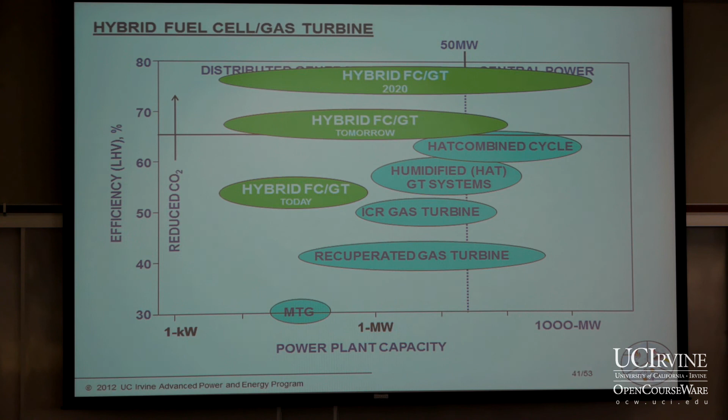Where does a hybrid pencil out? Right here today, it's operating in Montana at 53%. Tomorrow, 65%. And then in about 10 years, we believe, approaching 80%. And not only is the efficiency going up, but the range of application is going up as well. Very attractive for distributed generation.

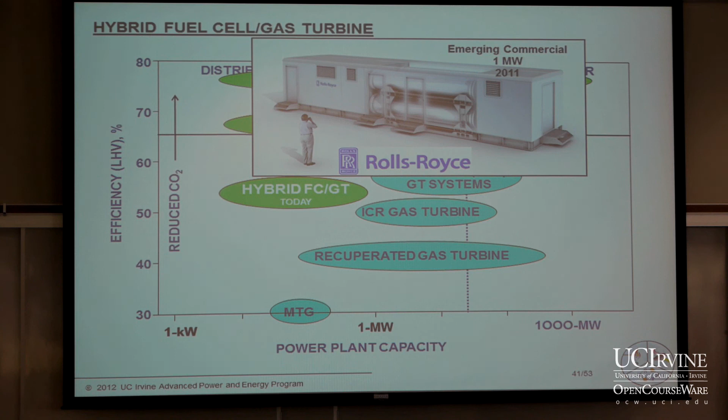Other places that you'll see it would be locomotives, a very major project going on with Union Pacific, General Electric, repowering locomotives for the future. Today, diesel electric is 30% efficiency, with substantial emission of pollutants. Can you imagine this being at 75, 80% efficiency, zero emission of pollutants, and acoustically benign?

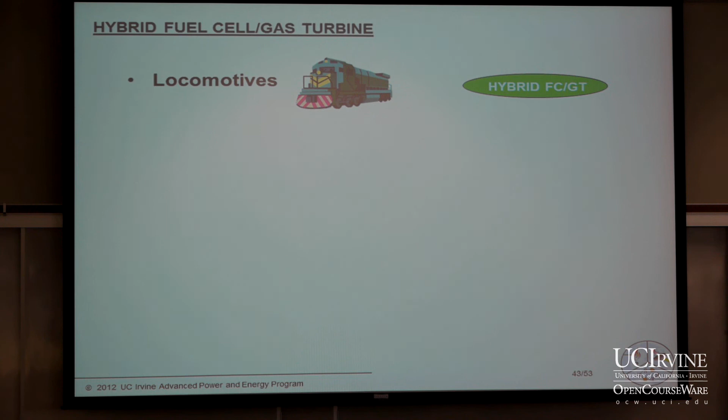Airbus and Boeing are right now competing vigorously to be first to have fuel cells on board. In the Paris Air Show last year, Airbus had an airplane that said right along the top, fuel cell powered. Not for propulsion, but for hoteling, providing the hoteling on the aircraft. Boeing and Airbus are competing for the most environmentally sensitive and sustainable aircraft in the world, and hoteling is a big part of having a competitive edge, and fuel cell hybrid systems are the technology of choice. So somewhat ironically, while this seems a little bit out of place, this will be the first commercial application other than distributed generation.

So these are the two areas that we focused on: transportation and electric power. We went through these examples, and we also have electric vehicles as well. So why don't we take questions at this moment and perhaps conclude as well.